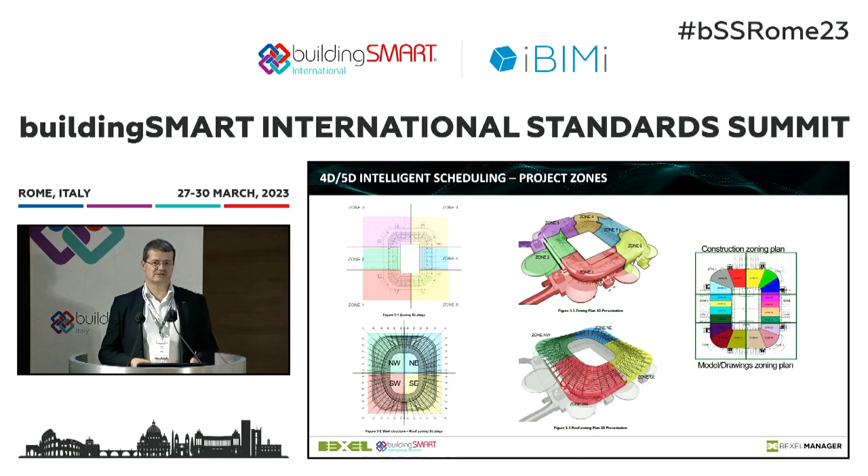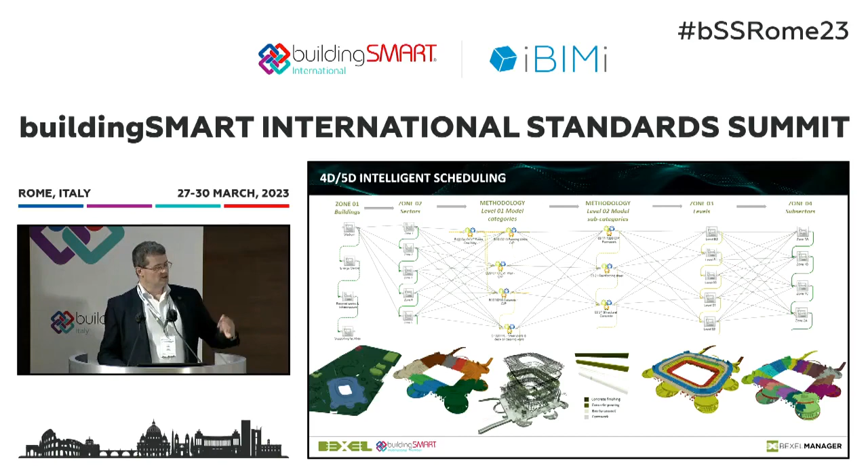This example is from the World Cup in Qatar project. This is the way you define all zones, and then the Bexel engine, by knowing the standard way you should build a building or football stadium, develops an initial version with around 50,000 tasks and 10,000 cost items.

So you'll see in just a couple of minutes, you start analyzing the BIM model. It has around 600,000 elements, slightly more, and Bexel analyzes all the properties, everything available, and then you have templates with the methodology - this is a recipe for how you're going to build this. Good news is you can reuse this on other projects as well.

You start with excavation, signage, and furnishing with, say, chairs. Then Bexel, in a couple of seconds or minutes, automatically loads those templates and creates initial construction schedules with thousands and thousands of tasks. You see those Gantt charts.

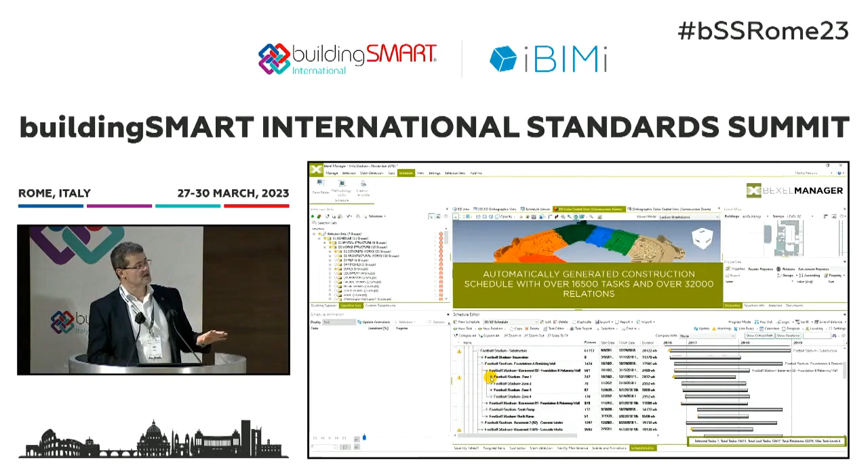And now when it's generated, the beautiful thing is you can see an animation of what we call the 4D and 5D simulation. Whenever you stop the simulation, you see the amount of money anticipated until that time.

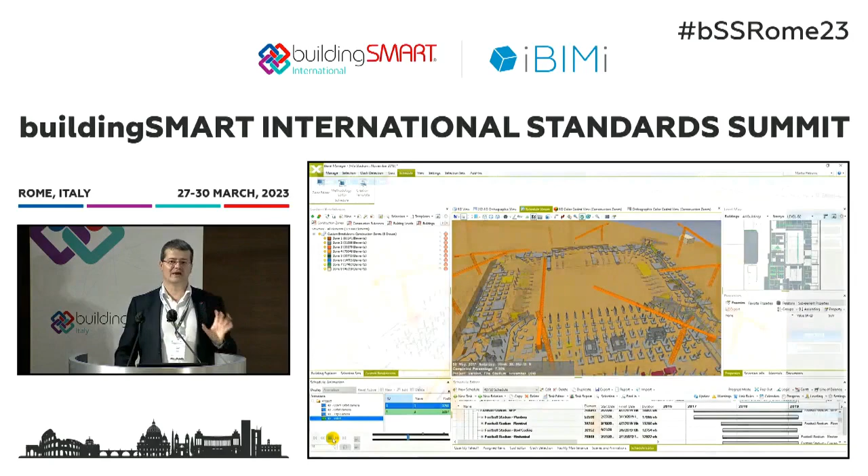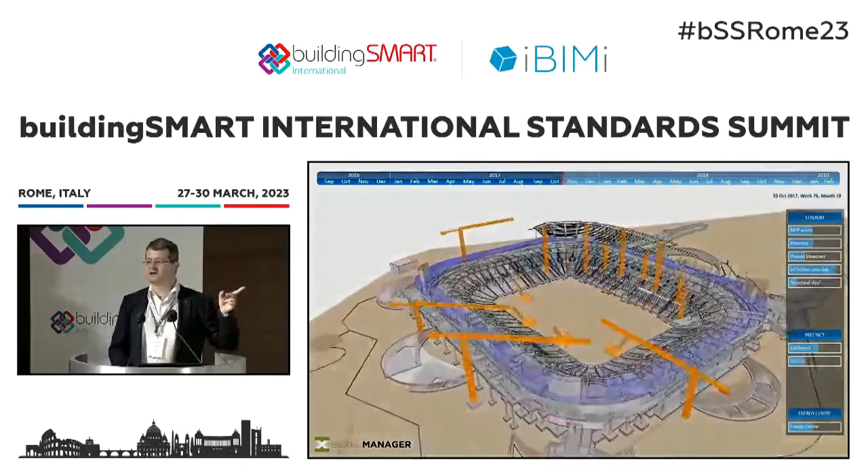But I just want to say, this is just one of the small end results. If the only result is this nice simulation, honestly speaking, we are talking about Hollywood BIM, and we should focus on the real true benefits. If this is the only result, that's just marketing - we honestly believe BIM could bring much more useful data.

These are earned value analysis, profit margins - you see visually where you are gaining money, where you are losing money. And to be honest, when it's just shown to the contractor, he immediately starts to be more efficient because he now understands that the client understands what's going on.

And the team is also motivated because they know that if they really do the right stuff, it will be noticed and traceable. Unfortunately, on most projects today, we don't know what's going on. We just have some basic clues.

You can see who is working more efficiently, carpenters or reinforcement guys. You can see what is more than anticipated, let's say concrete prices going up and so on. So with earned value, you can really identify where you made profit, where you are losing money, and so on.

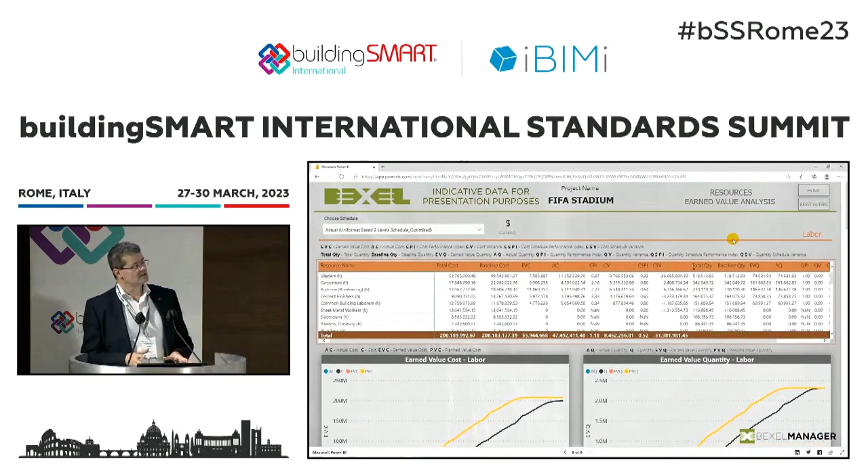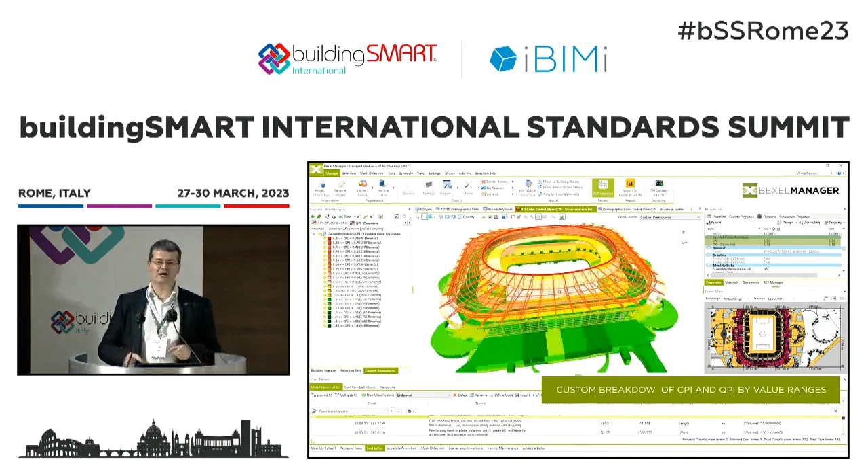This was the start of this analytics, and I will show you now with the color schemas a cost performance index. You can see that on the roof you spent much more than planned, and in green zones you spent much less than planned.

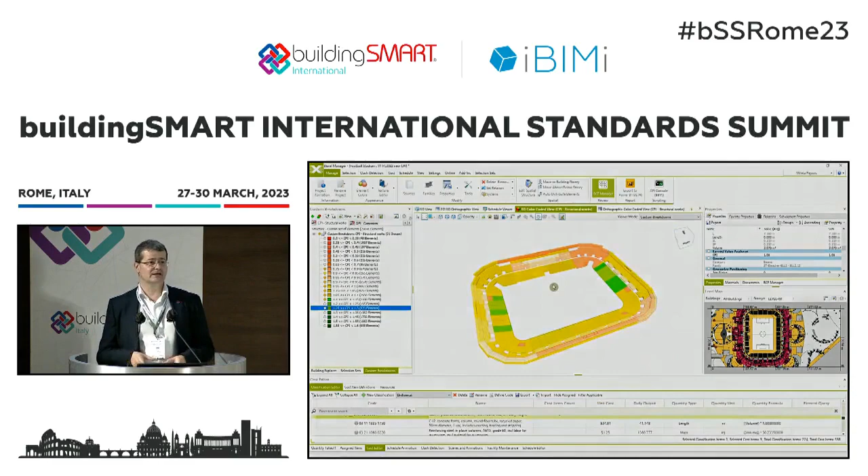And you can see also the efficiency of your workers. When you can do that, you can say I can really make professional data-driven decisions because I control the data. So there are plenty of additional workflows like progress monitoring, again BIM-based.

But I will focus in my presentation today on the end results for the owners, for the investors, for the guys who are not necessarily experts in BIM or just brilliant engineers. Because if we cannot convince them, we are going to struggle. We need to provide something very useful for them.

And what we did, we developed from the entire integrated ecosystem a subset, which we call the fit-for-purpose dashboards, which contain just a part of the project. So we can export just the small parts of the original IFC files, generate just a small part of the properties, because for each of the dashboards and analytics we don't need everything, and of course we don't need all subsystems and not all data.

Why don't we need all data on all our reports and dashboards? Because on these slides, and this is not the end of the list, these are just 21 data domains: materials, cost items, subcontractors, quantity takeoffs, point clouds, GIS. We really don't want to analyze all of them at the same time.

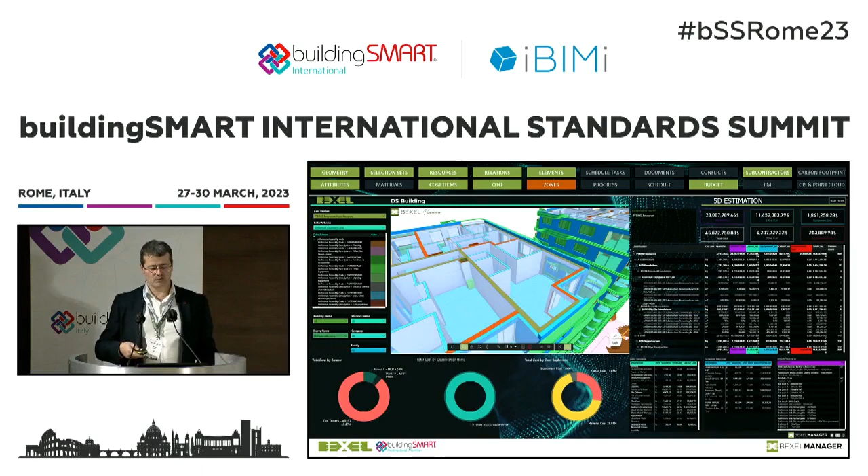So what you can see above are the domains included in that particular dashboard. So of course it's not always everything included. I have the issue with this.

Okay, the same thing could be done on infrastructure projects. So more or less, as we believe from day one, plants, oil and gas industry, railways, roadways, high-rise buildings, football stadiums - if you use OpenBIM, more or less everything will work fine. So this is, again, a cash flow analysis.

So you can see how much concrete work has to be done each month. But the beautiful thing is that you can visually see and color code, in this case, according to American Uniformat Classification. This is a similar example on a power station project.

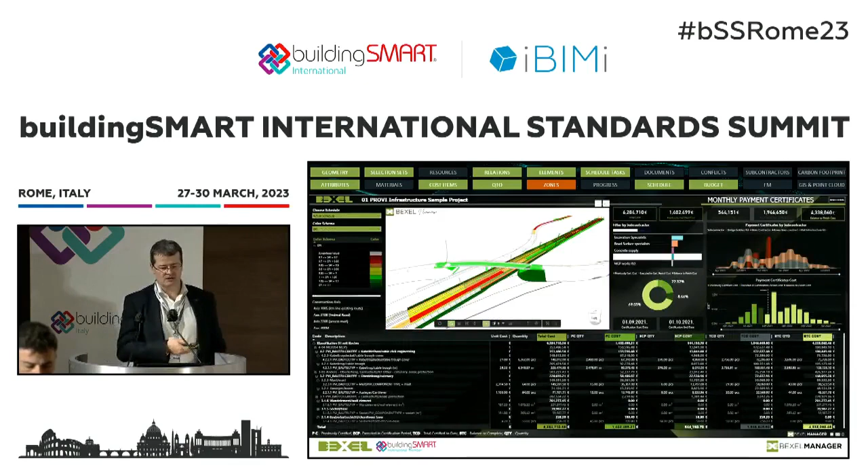Again, a lot of interactive dashboards with different color schemas, and an example with a payment certificate. You can visually see that the work performed in that month by that subcontractor is 1.5 million, but you have a lot of small digits as well, so you can see this is trustworthy, traceable information.

And the same goes on a railway project or on a large residential complex and so on. These are earned value analysis, so of course, very important for profit margins. You can see which of your subcontractors is spending more money than anticipated, who less, so you just have a feeling of controlling your investment.

And this is again with two dashboards. So you see Bexel Viewer on two screens, so you can see planned versus actual. Can you do it manually in PDF? Can you create two side screenshots? Can you send this as a progress report? Yes, you can, but this is more cool, more useful, more traceable, and the clients like it much, much more.

These are resource analysis again, or subcontractors on a railway project, and you can see that you can have linear dashboards which are more useful for infrastructure projects. This is the same with the tunnel, but in this case we chose chainage as a color schema, so we can decide what we want to see and have control of the project.

In this last part, I'll show you and explain how the workflow goes. So you have all this data in a single source of truth, and you are about to create your new dashboard. You just go publish the data.

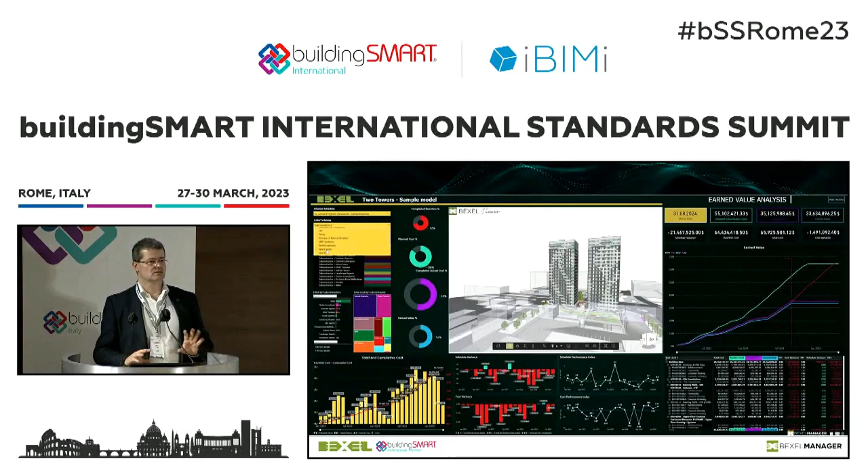This is a dashboard, so now you can see how you can play around with this data. These are, let's say, what is done each month. You just click here, see what's done, see the value, or this is a plan. In this case, this is earned value, so these are actual things.

The color schema in this case is per subcontractor, so each subcontractor has its own color, so you can see who is doing what in this project. You can have fully traceable information, it's just in time, it's trustworthy, and very easy to track. When you isolate a certain subcontractor, you see their work or their anticipated work in the future.

And now this is a cool thing. This is a cost performance index. With red color, we see where we are losing money or spending more than originally anticipated. In green are where we are making a profit. So we isolate one part where we are losing money and see a lot of red elements. When we click on a single element, we see that we paid 10,000 more than it was originally anticipated.

When we can do that, we have control of the process. Otherwise, we just need to be a genius in order to manage a project, because construction projects are the most complex human endeavors in terms of project management. There's not a comparable thing in terms of complexity.

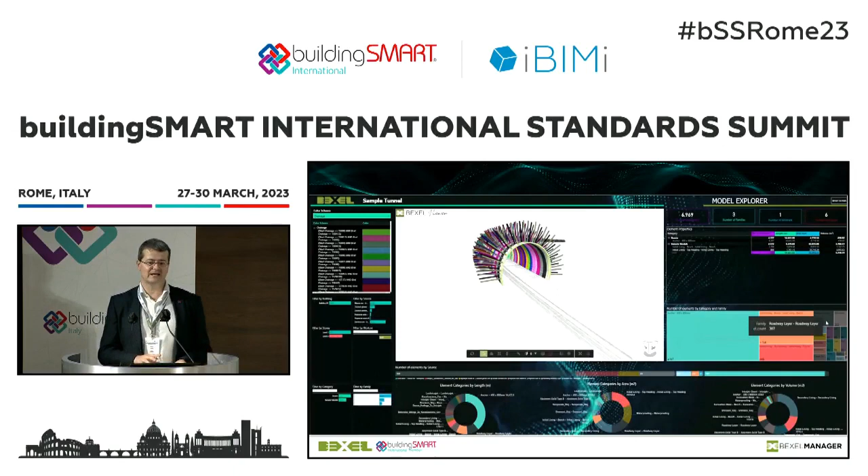If you just switch this, as we heard from Aka, interesting GIS - if you connect this with geology, you see a color schema coming from the type of the profile of the building, so you know if it's less or more complex. You have a very easy feeling of how to control this, very easily including or excluding any of the information you would like to see.

In this case, this is called a 5D estimation dashboard. So tendering packages - just isolate based on the color schema, based on the tendering package, and you immediately see the anticipated cost. If you want to see it just on a single floor, or just on a structure of the building, you can do that, or just one system and so on.

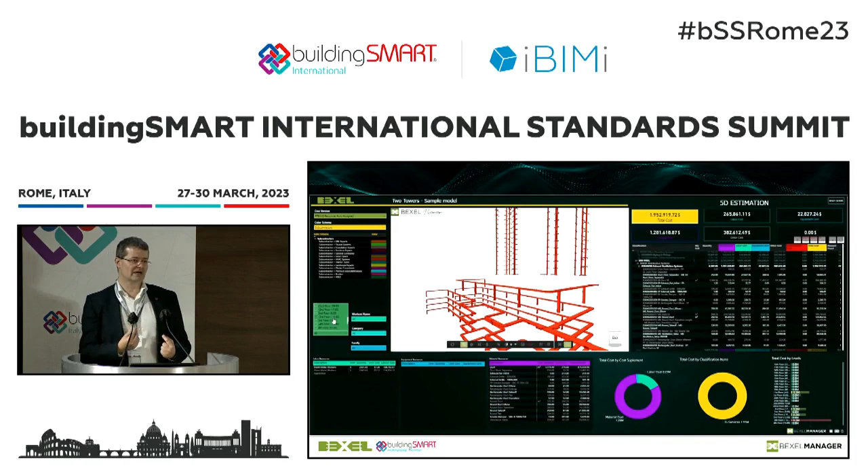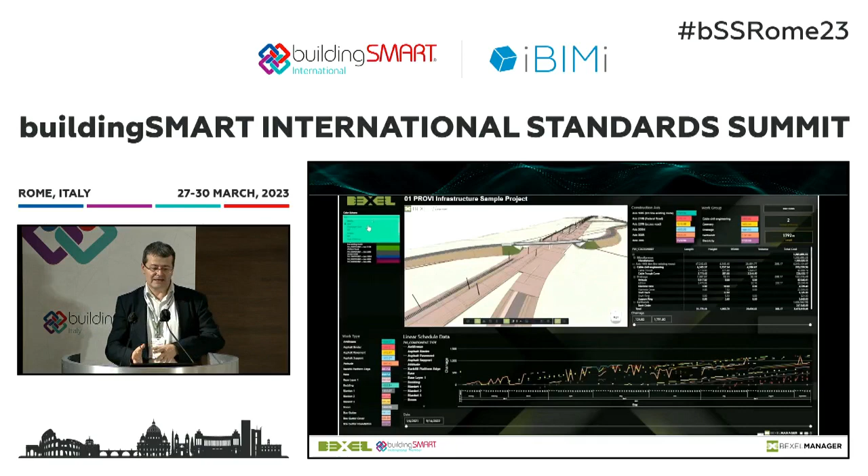So the idea is that you have traceable information. If you can define the minimum subset, in this case down to the single element, when you click on a single element you can see how much it's going to cost, because the information is fully traceable. In this case, the same example from one project in Germany, a railway project again.

Only difference is now you see much more of these linear things, which are of course much more useful. So this is the length in meters, and these are the months in the project execution. For example, you just say rails, I'd like to see that part, and I can see if this is properly done. We call this line of balance or flow line. This is a very important thing for efficient project planning.

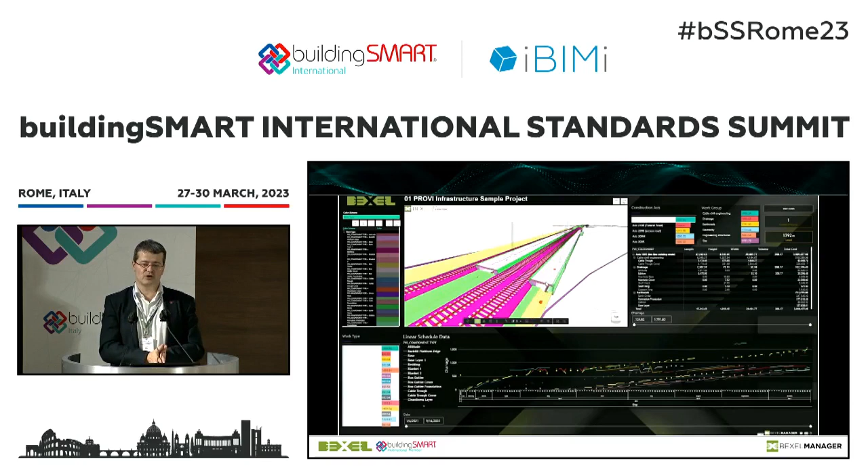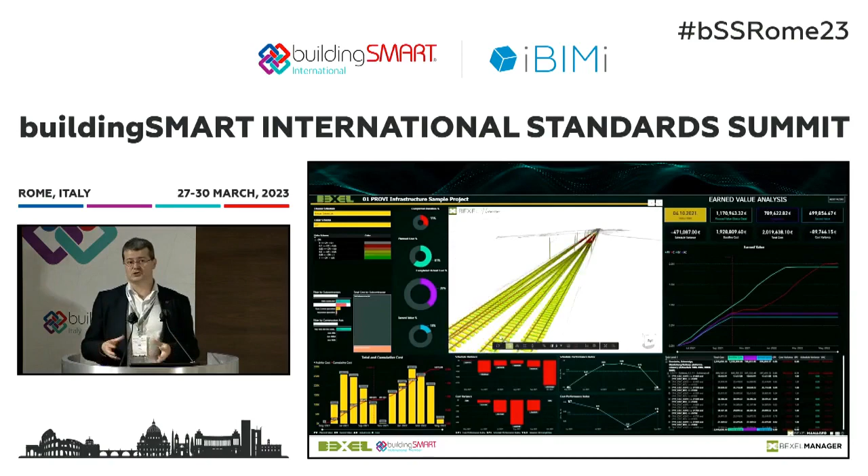You can again play around with this, and whenever you isolate certain things, you can see visually how it's going to be built, but also you can see cost estimated data related to it - more or less automatically generated based on intelligent formulas and intelligent workflows. Because even if you can create this manually, it takes months of work and nobody will use it because it's too expensive and too late to be efficiently used on the site.

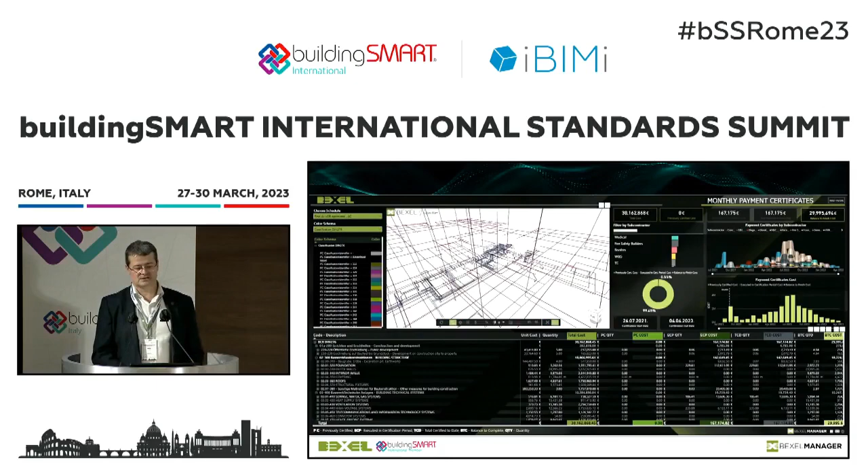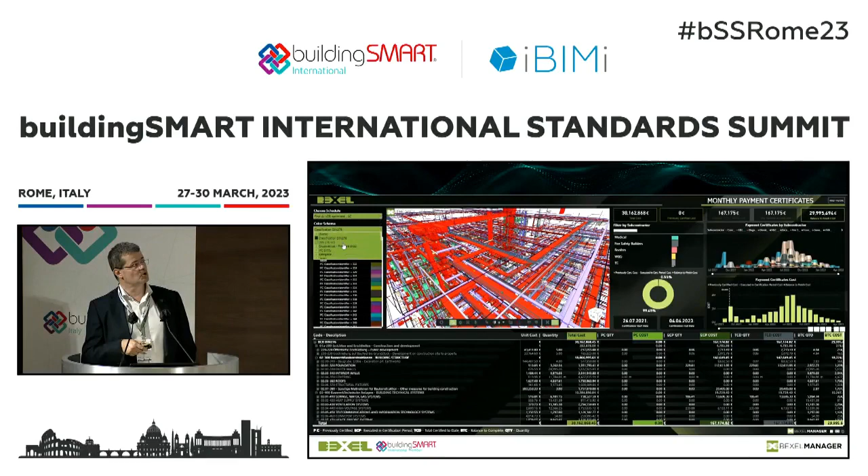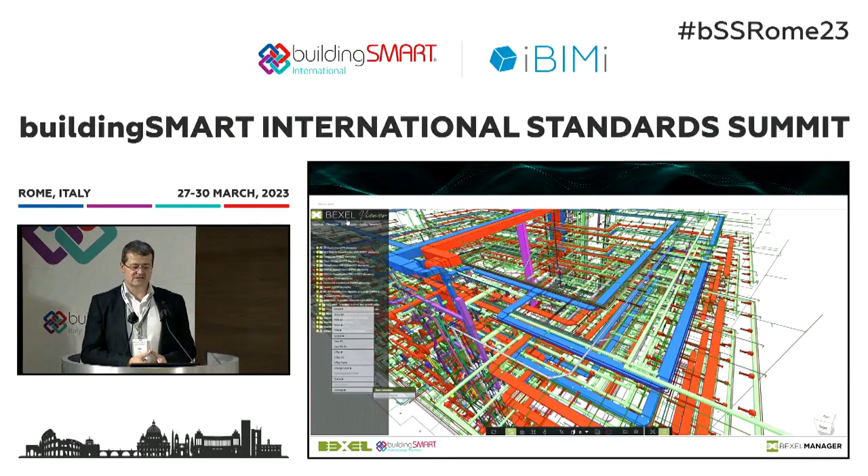Here you have a similar one, a quite complex project. You can see how monthly payment certificates are organized per subcontractor. Each color represents a subcontractor, and the user can choose which 4D, 5D simulation he would like to see, or which part of the project - in this case just engineering or utilities are in this simulation, color-coded per system.

Now, if you just isolate a single month or couple of months, you can see what the subcontractors have to do on that project.

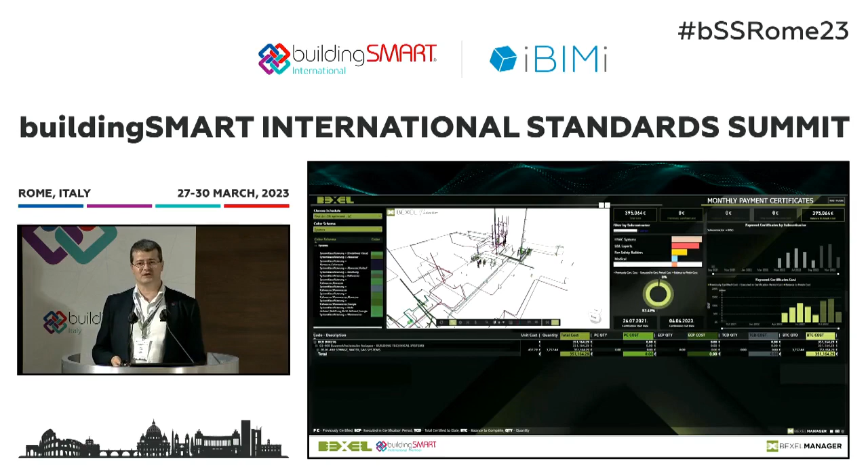To wrap this up, when you show this to subcontractors, they start to be more efficient even without any digitalization, because they realize someone will track what they are doing, someone will analyze this, and someone may even give them awards or bonuses if they perform well. Today everybody says nobody will notice if I'm efficient or not.

There's also additional stuff like BEXEL automation, where you can automatically present all these things, generated automatically across thousands of projects. We have an excellent example, one of the largest projects now in Norway, where every Monday morning more than 1,000 IFC files are processed.

Updated versions of 11 projects are automatically generated, and almost all those dashboards as well. So when you come into the office at 9 in the morning on Monday, you see everything updated. Traditionally it took sometimes days to update those models manually, as we all know, and then we don't have just-in-time information. Everything possible in BEXEL Manager is of course also possible with BEXEL automation systems.

At the end, there's also something worth mentioning - maybe my colleagues will talk about this.

This is called the portfolio manager. So one way is to analyze the model from below, to identify everything from below. And the second one is the top-down approach.

So to see all this analytics for all my projects, let's say in the Netherlands—this is what BEXEL Portfolio Manager is. The idea is to have advanced contract management, efficient processes, lowered project risks, and we hope in the future lower insurance premiums, because we tremendously lower the risks of execution of our projects.

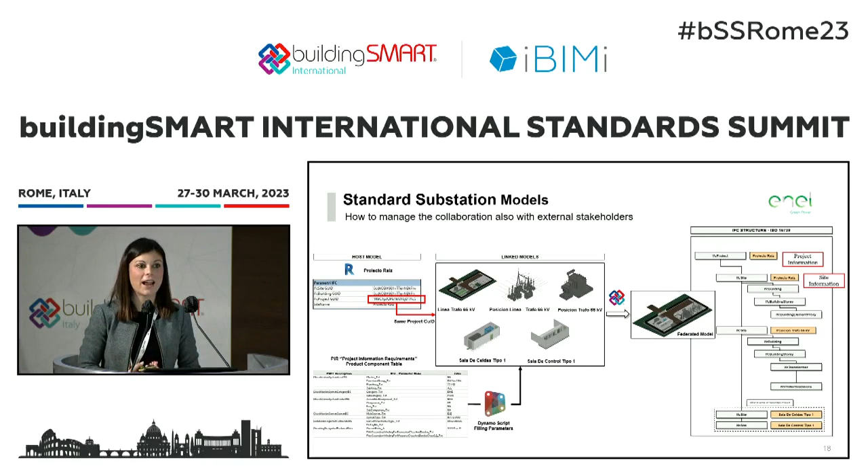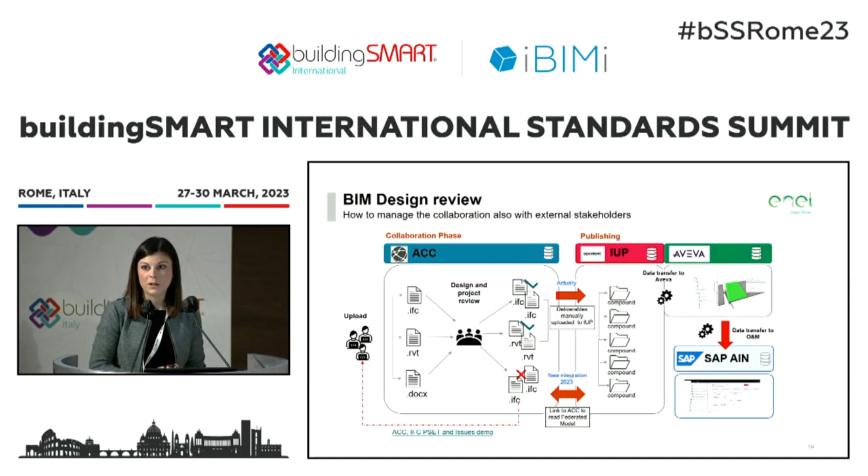Il messaggio che vorrei diffondere è che noi lavoriamo per veramente l'integrazione. Poi infine, anche con ovviamente tutto il mondo SAP, cerchiamo di trasmettere in maniera automatica le informazioni dalla fase design construction fino alla gestione.

Nella fase di construction abbiamo portato delle prime applicazioni. Lo scorso anno abbiamo iniziato a parlare di 4D, un pochino di 5D, ma l'attività che stiamo portando avanti quest'anno soprattutto è di portare on site non solamente la parte di 4D e 5D, che magari è rivolta anche più ai costruttori.

Noi come committenza dobbiamo essere sicuri che i dati, i report che ci trasmettono siano coerenti e corretti, e quindi dobbiamo digitalizzare in qualche modo tutti questi input, a tal punto che in questo grande cambiamento verso il digitale, oltre a tutta la parte di construction team, quindi coloro che sono coinvolti alla direzione lavori, all'interno stiamo anche diffondendo l'applicazione a tutto il team di safety, perché sicuramente anche da quel punto di vista stiamo vedendo che delle ottimizzazioni possiamo ottenerle.

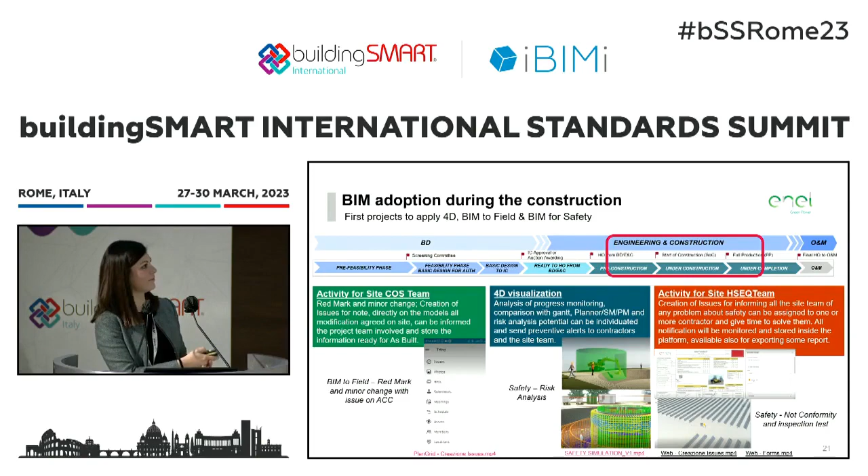Scusate. Ecco. Infine, per concludere, abbiamo tutta la parte di operation and maintenance. È molto importante questa attività perché abbiamo visto, quando abbiamo cominciato a indagare i vari applicativi, che l'handover verso O&M

molto spesso è manuale. Quindi abbiamo analizzato e strutturato davvero le functional location, quindi tutta la struttura dei nostri componenti che recepiamo in SAP, in modo tale da essere collegati in maniera automatica ai nostri applicativi che ricevono il modello as-built. Quindi in questo caso è rappresentato il workflow.

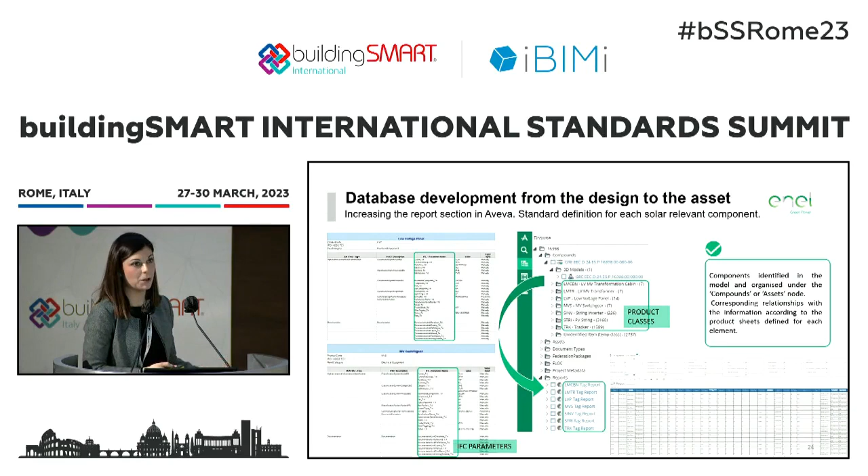In questo caso abbiamo anche delle applicazioni di report perché gestiamo le informazioni e infine per quanto riguarda la parte di struttura potete vedere che c'è stato un'analisi e studio approfondito da parte anche di tutto il nostro team di ingegneria, collegato ovviamente al team di O&M.

Come next step, per dare qualche input sui topic su cui stiamo lavorando, abbiamo sicuramente la forte volontà di identificare in maniera preliminare e strutturata i nostri fornitori sui requisiti BIM e quindi stiamo intervenendo anche sul sistema di qualifica. Inoltre vogliamo anticipare il BIM nella fase di business development, quindi quella fase preliminare in cui si comincia a capire dove convenga sviluppare un impianto, incrementare il BIM come anticipato prima nella fase di construction.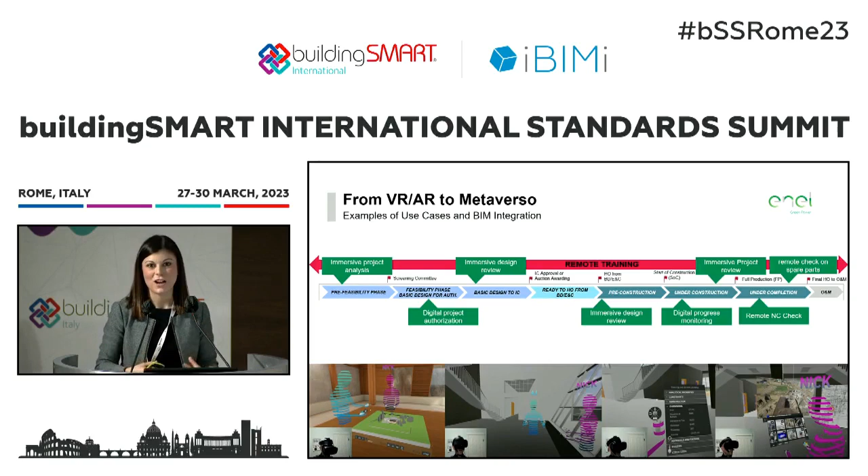Per l'ultimo input, e poi ho concluso, noi stiamo veramente traguardando questo tema del metaverso, dove siamo partiti dall'analizzare la VR, la AR, ma non è la stessa cosa del metaverso. Stiamo cercando tutti insieme, proprio come Enel, a portare i nostri impianti per rendere quello spazio, diciamo, virtuale davvero reale. Con questo ultimo input vi ringrazio e ci sarà modo di approfondire. Grazie.

Grazie ancora, adesso ci sarà il mio intervento, cerco di recuperare un po', siamo partiti un po' in ritardo, quindi dalla regia.

Ok. Allora, quello che vi presento oggi è un po' il lavoro del gruppo creato all'interno di buildingSMART che si occupa di impianti elettrici. In particolare ci siamo concentrati su un particolare tipo di impianti che sono gli impianti di rivelazione incendi, gli impianti IRAI.

Vado velocemente, sono appunto formalmente uno sviluppatore software, però ormai da tempo mi occupo di BIM, di sviluppare software e prodotti all'interno di questo mondo. Faccio parte di buildingSMART dal 2019 e sono da poco stato eletto come consigliere nazionale. In generale però mi occupo tantissimo anche del settore elettrico all'interno di BIM, faccio parte infatti del sottocomitato 3D del Comitato Elettrotecnico Italiano.

Innanzitutto vi voglio raccontare che cos'è il BSDD, che è uno degli standard realizzati negli ultimi mesi da Building Smart. Il BSDD, che significa Building Smart Data Dictionary, è un servizio online che ospita classificazioni e relative proprietà, valori consentiti, unità e traduzioni. Quindi il BSDD contiene sistemi di classificazione nazionali, quali l'Uniclass o il MINnD, che è un progetto francese, standard specifici come l'ETIM o Universal Types, oppure standard nazionali o privati.

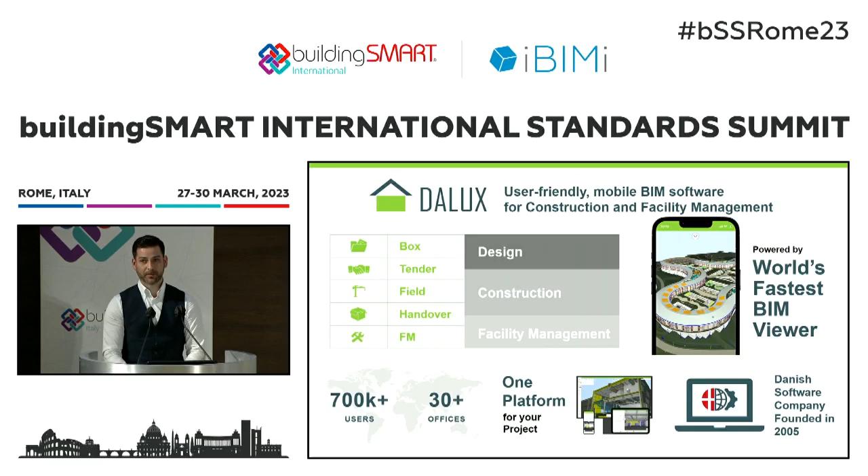And one of the main reasons why is because we like to make complicated things easier to use.

But before we begin, before I get into the presentation, I know obviously I'm from Dalux, so I'm going to be showing a lot of stuff from Dalux. But the important thing with this presentation is to keep in mind the concepts of what it is that I'm talking about through the use of open BIM principles.

Now, to start off with, I'm going to tell a story about a project manager called Tony, who is coming up to the end of a project on site. Deadline's fast approaching, and his client comes up and says, 'Hey, do you remember all of the lovely handover information you're going to be giving across to me about my project? How are you getting on with that?' Tony initially thinks, which requirements are those again? I need to check to make sure that I have the right things.

But he does recall a conversation that he had with someone very early on in the project regarding the lighting. And the lighting was of critical importance to the client and understanding what light fittings were installed and where. So he goes onto site and he asks the electrician, 'Hey, do you have my product data? I need that to give it across to the client.' The electrician manages to pass across all the product information that he had of the objects that he was installing.

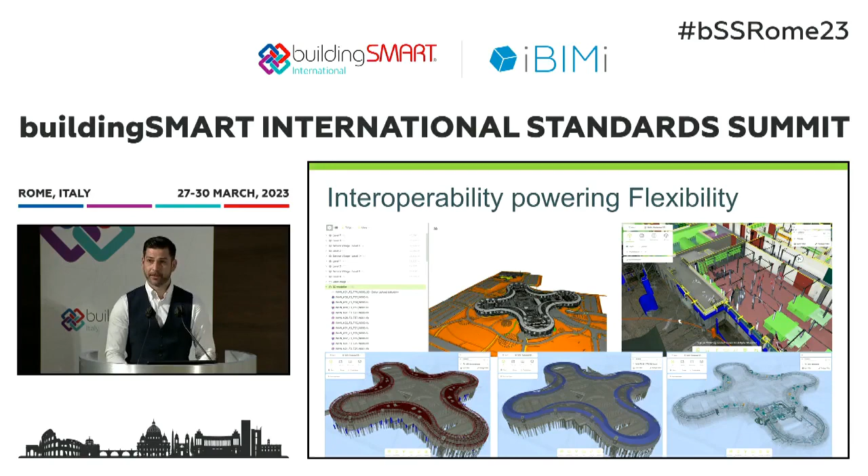So you can see there's a lot of information. In this particular project, there are 215 models. This time there are also DGNs, DWGs, and some topography layers. There's a lot of information involved in this, as well as point clouds—lots of different people creating lots of different information.

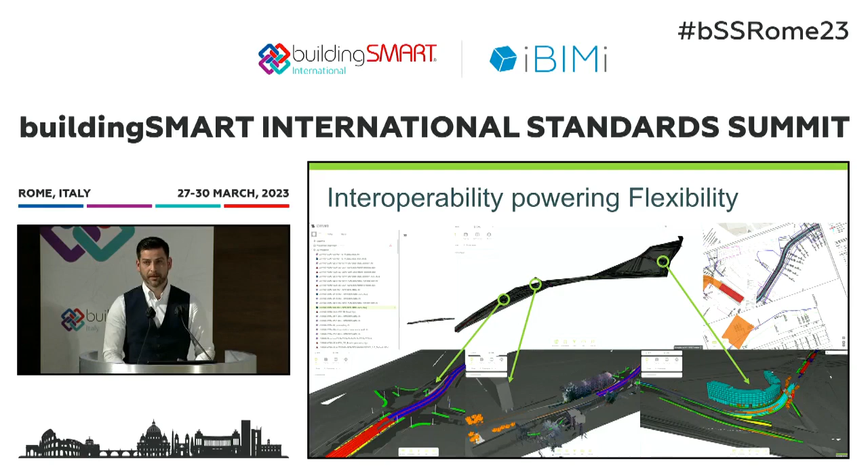You need to have the interoperability there to allow the flexible systems. So now you have flexibility, you're able to collaborate through flexibility. The network of people all have to speak to each other because of their different systems, because of the hierarchy of requirements that they need to provide—subcontractor provides information to main contractor up, consultants, etc.

You could use the main authoring software, but that's likely to be very expensive, and you'd be very lucky if you have one project that only utilizes one ecosystem. I know, for example, a lot of steel fabricators use Trimble software, they use Graphisoft software, they use a lot of different things there. They all need to be able to communicate.

So you need something that brings all this data together that allows you to see the content in context. Once you have that, all of these dots—which may or may not be visible from where you are—represent different points where people have either made observations, whether on the design side or on site, comparisons against what is the intent versus what can actually be constructed.

Obviously the main critical element with IFCs and other geometric information is the parameters—what's the fire rating for the door, what kind of water system is it that I'm putting in for the drainage. All of that information, if people have access to it and have the capability of viewing it in a simple and easy way, they can start talking, they can start collaborating, they can start working together.

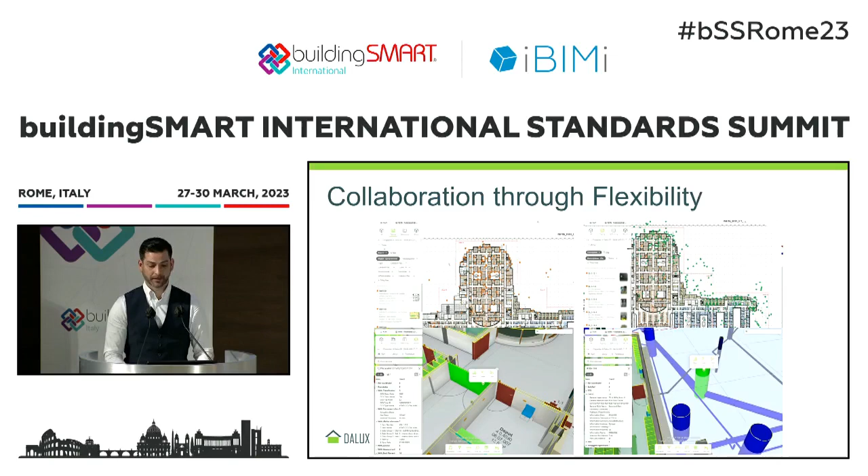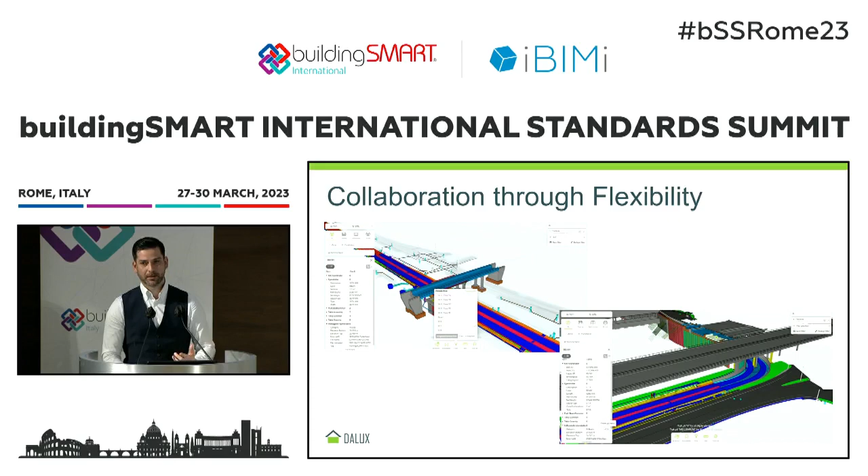So now you start getting people talking, you can start getting the reliability of information exchanges. It comes back to the hierarchy of requirements. We all have contracts, we all use them, we need to set out who is providing what, who talks to who. Typically, if you provide that information to a contractor, subcontractor, or consultant and they don't understand what you're asking for, you receive the wrong information at the end. We want to get it so that people understand what they have, so they provide the right information.

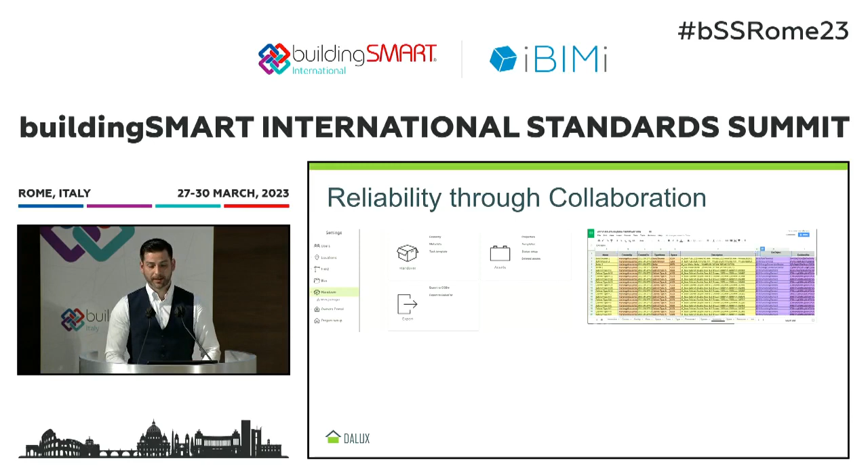It's great having it in one system, but you need to get it back out again. Not one system is perfect, so you need the ability to both import and export into open formats. At least in the UK, there's a big impetus on COBie information, which is effectively an interconnected database for asset information. But it's not just there - it can be going into facilities management systems. There needs to be the capability of taking all of that great information created on a construction project to give you the right information, and then bringing it into a system or software that allows you to maintain the asset almost immediately.

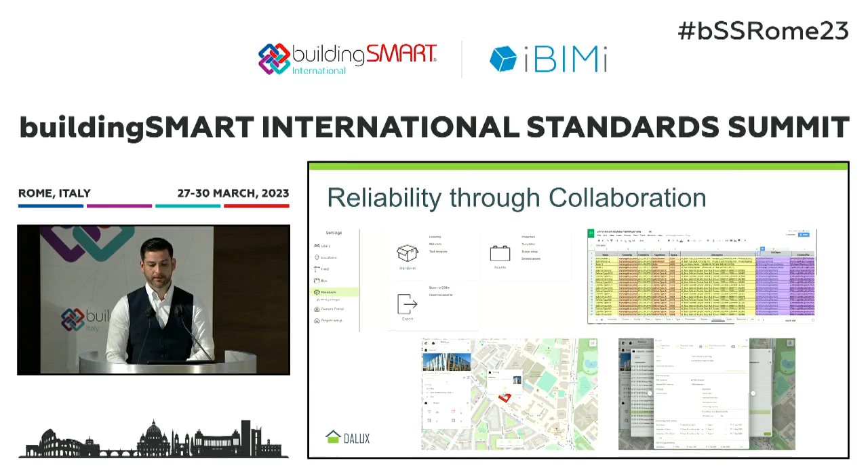So the main part of this presentation is really to show people what they need to do, when they need to do it, in a way that they can understand how to provide it. If you can't provide that information to people, you won't be able to get success in the delivery to management phase. You will get the wrong information, there'll be backtracking back and forth. You need to have that reliability of information through collaboration, through flexibility of systems, through the interoperability provided by open standards. You have to have that. Basically, delivery phase to management phase - it's as difficult as you choose to make it. Thank you.